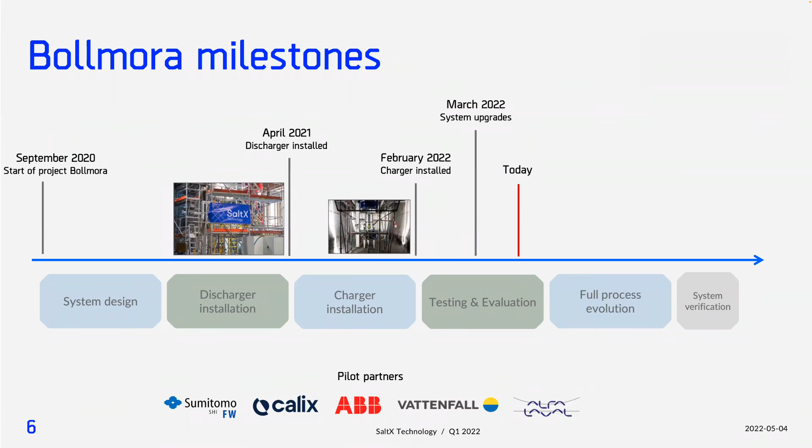Renewable energy, it's all about peak shifting. You know that. I think I mentioned that in the beginning also a little bit, that you have to charge the battery, you have to charge the material once the energy is cheap, and then you have to use it once it's expensive, so to say, to make good business out of it.

But looking on the comments that I made, the renewable energy on demand, the energy storage actually makes it controllable, disregarding cheap or expensive energy. So it's a way of taking the full step into a fossil-free situation.

So many cities and many countries are working with this, and once they are there, because it will happen, we are convinced it will happen. It's a question of time. They need storage applications, because if they install 100, they need 20 in energy storage to be able to control the supply.

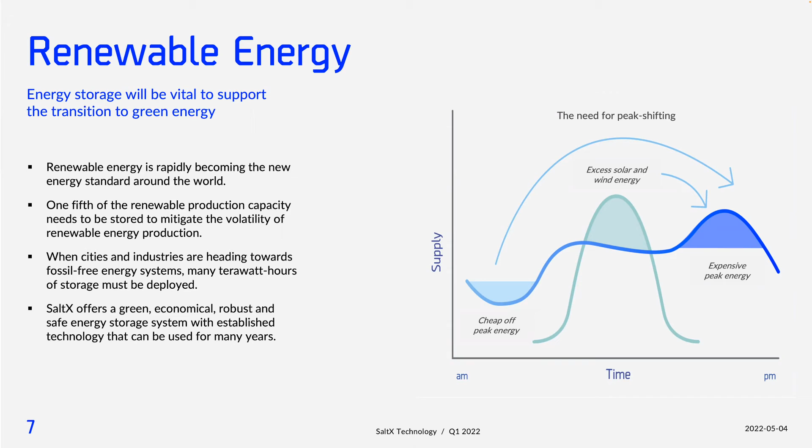This picture you have maybe seen before. It's a slight modification of it, and we see that we are still aiming for the big capacity, for the high capacity from 10 megawatt hours and upwards. But the difference is that we have made an adjustment now for the industry, a little bit shorter storage duration, and we are talking about days here, and that's a typical application for industry, that they are charging and discharging, and then they're using the steam in their production.

But also there are other applications like the combined heat and power installations that need long duration storage, and it's a different application. Again, we are following the demand, we are following the market, and we are listening to the customers that want to have this. In a short duration industry, it's a slightly less complex solution than the other one, but we are close to the customer, and that's the key thing here, really, to be close to the customer.

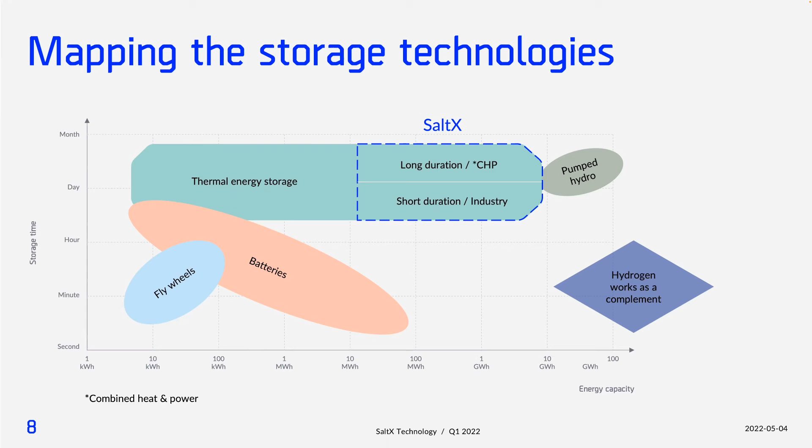Looking on the applications under development, heat to heat, power to steam, power to power, yes, they are under development, but I want to be very clear that the focus area is power to steam, no doubt about it. That's what we are focusing our efforts on. There are some discussions going on with the others also, heat to heat and power to power, especially with some special partners that are looking at supporting us here. But there's no doubt about it. It's power to steam, and it's the steam.

We find our solution very suitable for the industry, and the industry is more precise in their requirements, what they want. They know very well what they want, and they know also that they can utilize the conversion to fossil-free production as a very, very good argument in their company also. So we believe very much in industry application.

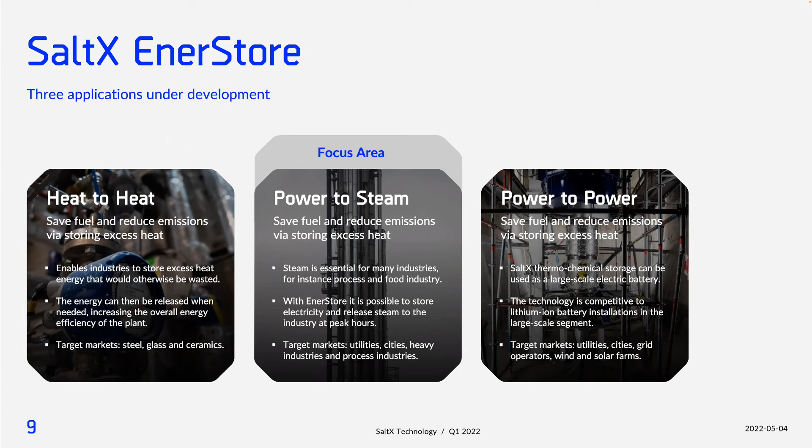And what is then the industry application? Well, you can see it like this, that on the bottom of this picture, you see that the conventional solution is really that you use oil or some other fossil fuel, store it in a tank or whatever, and then you use a conventional burner, and you will release a lot of emissions by doing that. Of course, we all know that. They're using the burner once they need steam for the production. It's not 24/7, but they need it quite often.

And a way to change this is actually to utilize the solar and wind, and through the electric grid do the charging of the material, as we have been looking into, and to have a heat storage where you can release the steam once you need it. It's the same principle, but there are no emissions in the upper case here. And this makes it, of course, very attractive, this solution.

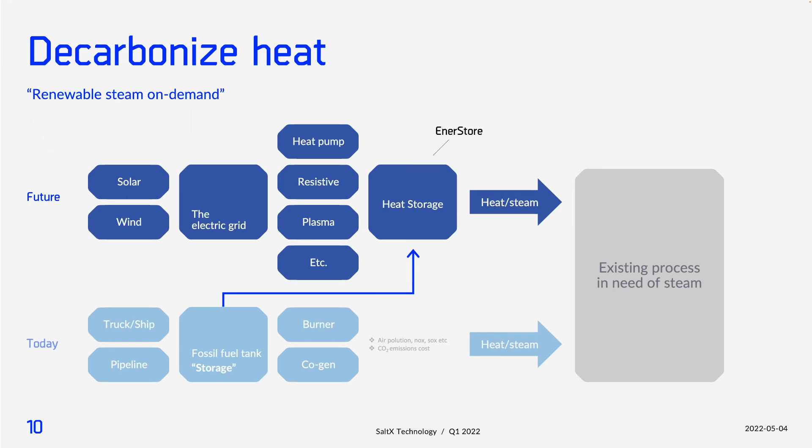The typical models for the storages is a charging reactor. I mentioned that. In Bollmora, it's SaltX. The discharging reactor, it's Sumitomo Foster. And then we have the storages. We don't have any major storage installed in Bollmora, but that's not an issue.

The thing is that we need to make the process itself, charging and discharging, verified from a technical point of view, and we're also working with a third-party verification of this case in Bollmora also. So the material is supplied by Nordkalk and Wacker, and Alfa Laval is a part of this. You heard that, and also ABB.

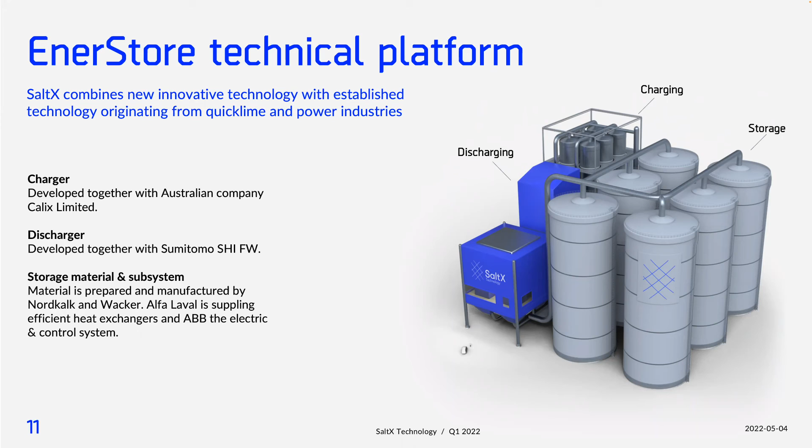So the beauty with this solution is really that you can tailor-make it. You can make one power on the charging and another one on discharging, and you can adjust the amount of material then depending on what sort of storage capacity that you want.

Now let's spend a few words about this new innovation. And as I said, the background of this was really that we wanted to have a good charging reactor to make it possible to build large storage applications. We looked into various solutions here, and we actually ended up doing the development by ourselves together with some partners. And this is strategically positioning our company in a good way, where we also have a patent pending for this innovation.

So what is it all about then? Well, it's about, we call it EAC, electric arc calciner. That's the new charging reactor. And I will not go into any more details about that, but the EAC is actually suitable for the energy storage application, for charging the reactor, which means that we have a very powerful storage for the industry. The reactor itself is ours. We have the rights of it. We have the patent pending, which is very important here also.

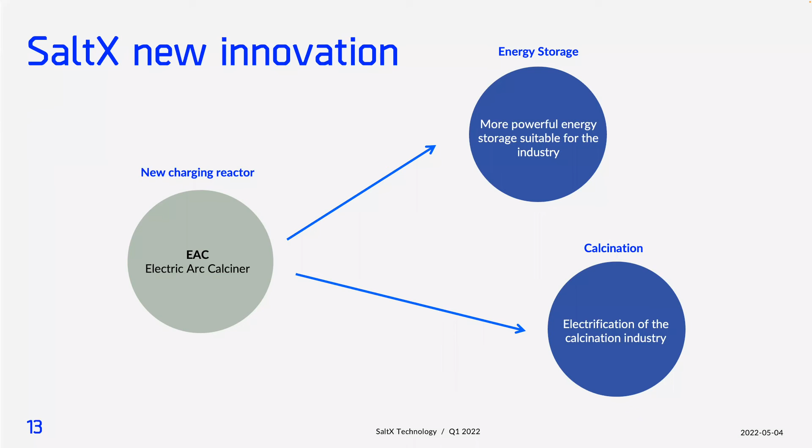But that's another application for the EAC compared to the energy storage. So that's important to remember. And that's slightly another sort of temperature and process, but it's the same basic principle. So we are very excited about this, and we think that this is going to be a very interesting future. And this is not anything that we have done on a PowerPoint or anything like that. This is a real reality.

We have made a test in the middle of Sweden for a number of weeks, and we have some results here, of course, and it's very suitable to scale this technology up to higher power and also to very high temperature. And it depends on what you compare with, but looking at the conventional technology and conventional process today in certain industries, this is going to be much more simplified processes, and competitiveness will be high.

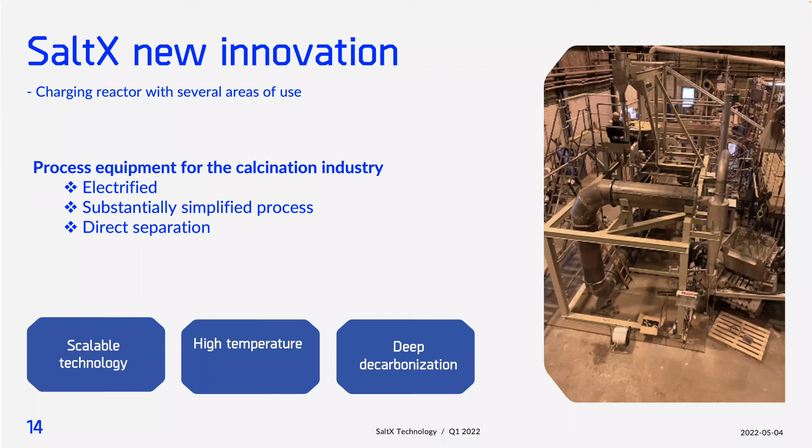So exactly what we will do here, we don't know yet, because this is an additional leg actually to stand on in the company, but we will come back to that later on. But it's a sort of a breakthrough innovation. Looking at the world and the challenges that we do have in the world, looking at the cement industry and the calcination industry, it corresponds to about 8% of the total emissions. And if you should convert that into a country, it would be country number 3 in the world

to let the emission out. And looking at the production of quicklime, it's actually 400 million tons. And looking at the production of cement, it's 4,500 million tons. It's hard to understand, really. It's hard to verify how much material is utilized. But cement is the second most used material in the world. The first is water, and then comes cement. So then we all understand that it's a huge impact, a huge potential, and it makes it possible to change the world here.

It will not be done overnight, of course, but it will be done in cooperation together with some key partners, and ABB is one of them for sure, and they also have very, very high interest in this technology and what we can do together here, because they also, as I said, want to electrify. So, but again, the EAC, electric arc calciner, one application is the energy storage, another one is the electrification of the industry. So two separate applications.